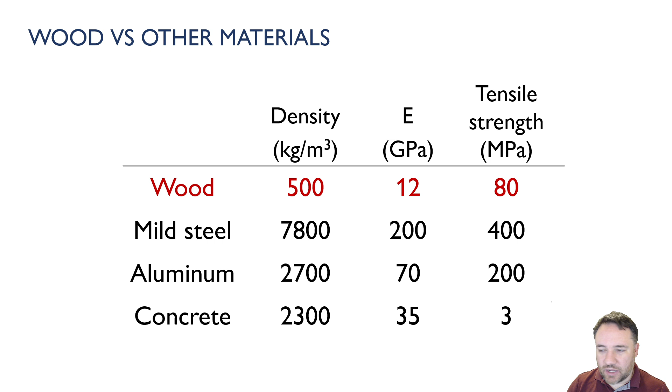So the question arises: why would we ever use wood at all if it's not efficient? Well, the reason is because if we look at it from a point of view of strength versus weight, wood suddenly becomes very competitive, because it has very high strength to weight ratios.

For example, if we look at tensile strength as a function of density, you can see that it has strength much higher than steel and close to that of aluminum per unit weight. Same for compressive strength—it's much stronger than steel or concrete as a function of its density. So it has a very high strength to weight ratio.

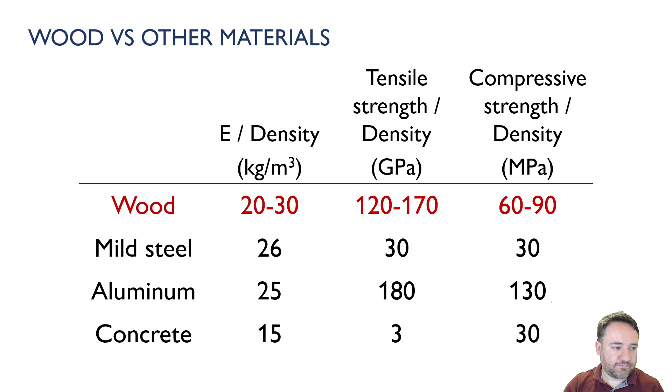That means when we want to build things out of wood, the members are going to be very light. They're probably going to be bigger than comparative mild steel or concrete members, but they may be easier to install, ship to site, and handle on site—on top of all the other benefits of wood we talked about in previous videos.

Now, if we drill down into the mechanics of wood as a material—and I have my piece of wood over here—we talked a bit before about how wood is not the same in all directions. Unlike steel, if I load it this way, or this way, or this way, it's going to be approximately the same in every direction. But for wood, that's really not the case.

Wood is strongest in its longitudinal direction, meaning me pulling or pushing on it like this, and it's very weak in the radial and tangential directions. Remember from looking at the cross section that we have a radial direction coming out from the pith, and a tangential direction, which is tangential to the growth rings.

In general, we don't know exactly which direction those rings are going to be in any given piece of wood. But luckily, tangential and radial strengths and stiffnesses are similar to each other, so it doesn't really matter which way the grain goes in those two directions. I'll consider this direction and this direction to basically be identical for design, using a worst case, and I won't be losing much by doing that.

So instead of talking about radial, tangential, and longitudinal strength separately, we really only talk about it in terms of longitudinal versus perpendicular to the grain strength—parallel to grain strength, which is equivalent to longitudinal, and perpendicular to grain strength, which is both radial and tangential. It doesn't matter if we look at it up and down and side to side, or radial versus tangential.

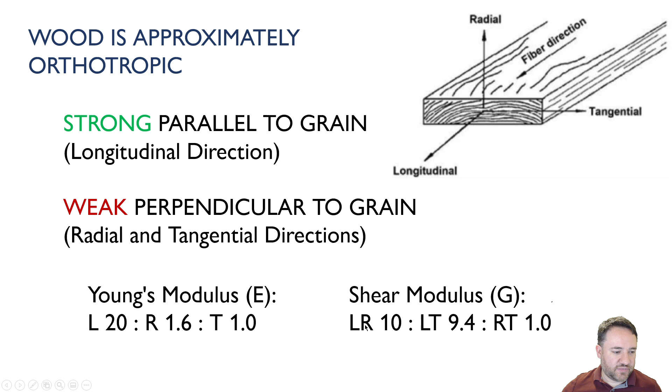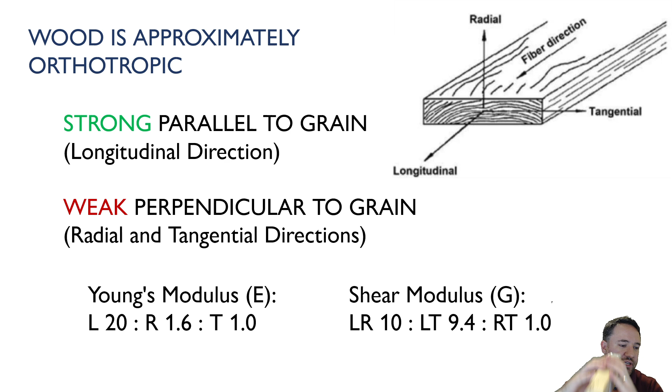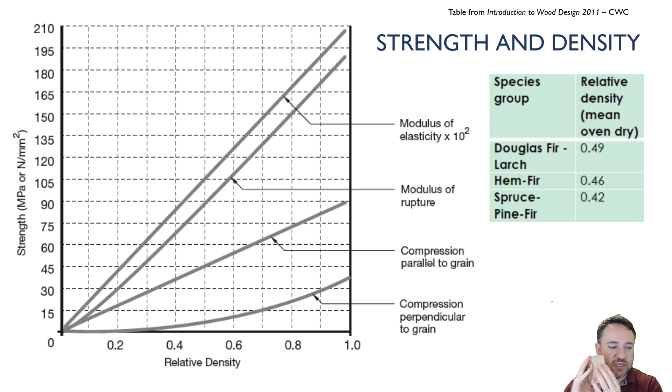Now, for different species, they obviously have different strengths, and we talked about hardwood and softwood before. The strength of the wood is typically directly correlated to the density of the wood. So the more actual wood fiber material in this piece of wood, the stronger it's going to be, basically, per unit volume. And that applies to strengths.

You can see here the compression strengths parallel to grain, which is like pushing like this, and perpendicular to grain, which is pushing either like this or like this. The higher the density, the higher the strength. Modulus of rupture, the same, and modulus of elasticity. The stiffness is also approximately linearly proportional to the density.

You can see the density of common species that we use for construction here on the right, about 0.4 to 0.49. There's not a lot of range. So you can see that our compressive parallel to grain strength, for example, varies in quite a small range for the species that we're usually talking about. In fact, probably specimen to specimen differences are going to be much larger.

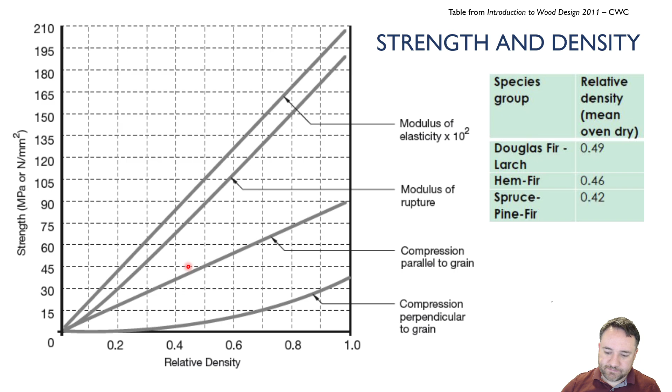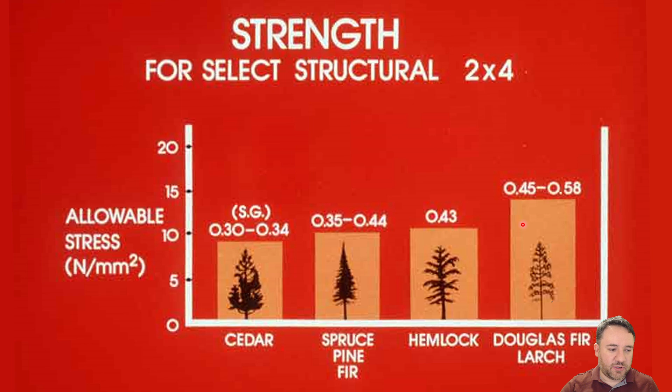And so if we take a whole bunch of these, line them up all in this longitudinal direction, thousands and thousands of them, then put them all together, bind them with that material lignin, then we get this solid piece of wood. And the strength of the wood is directly correlated with the strength of the fibers. So the fibers are strongest in the vertical direction, and so the wood is also strongest in the vertical direction.

So one way to conceptualize this is using straws. If we see I have just one straw here, and this straw can represent one wood fiber, and this straw is very strong in tension, except for the fact that this is a bendy straw. It's very strong in tension. It's strong in compression up to the point that it buckles.

But it is not very strong in the perpendicular direction, right? I can just smush this straw very, very easily. I'm just smushing this thin circular cross section, which is very similar to what the wood fibers look like. And if I were to pull apart as well in this direction, it's not quite as strong. But for the fiber itself, it's not too bad.

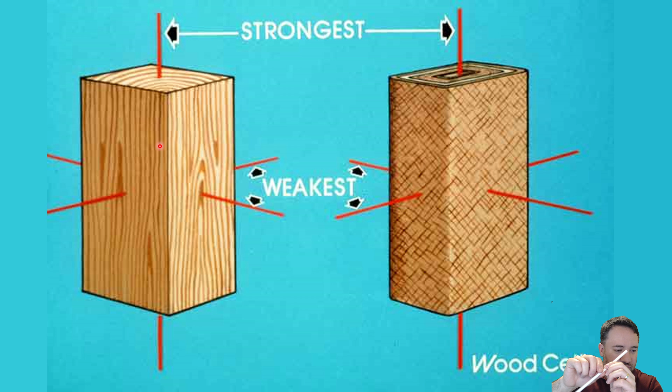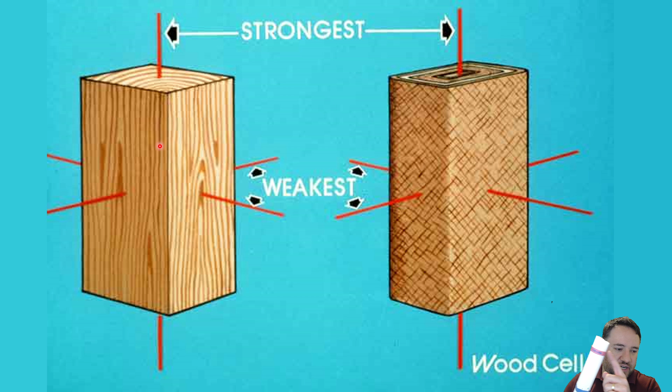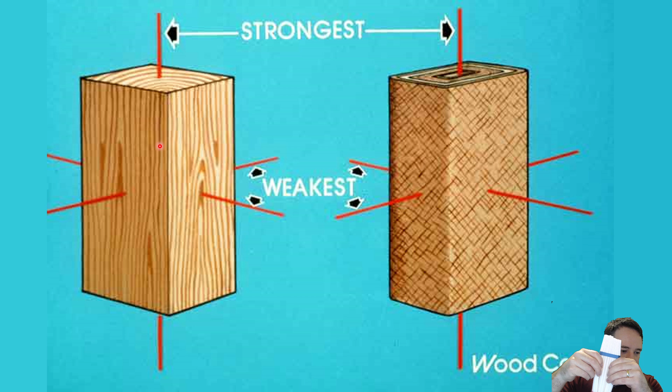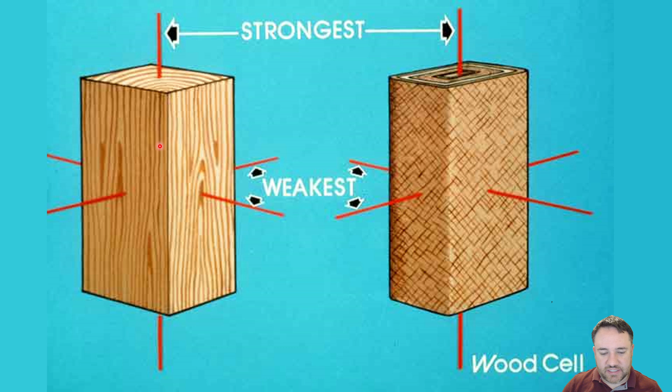But once I stack them all up, it's going to be a problem. So if I take a whole bunch of straws and put them together just with some elastic bands, these elastic bands are now representing the function of the lignin, which holds all these fibers together in the real wood structure. Now I have something that's very strong in tension, very strong in compression, as long as those fibers are held together by the lignin, and very weak in this direction, and also very weak in this direction, because I can pull those fibers apart potentially, depending on the strength of the lignin again. So we're going to go through each of these mechanisms for loading and relate back to this example of the straws.

So why is wood developed this way? Why is the strength of wood in the vertical longitudinal direction? That's the way the tree grows. Here's a piece of wood cut out of a log. The log is vertical, the tree is vertical, and the pieces we cut out of it are in the same direction, because that's the long direction of the tree. That's how we get long pieces of wood.

So why is it that the tree has its strongest direction in the vertical? That's because the primary structural load on trees typically comes from wind. Wind is a lateral load on the tree, which wants to blow it over.

In order to resist bending, we know from mechanics that we need tension and compressive stresses in the wood—tension on one side, compression on the other. If I'm pushing this way, I'll have tension on the near face and compression on the far face, just like shown here. So if the wind is pushing toward the left on this tree, one side of the tree will be in tension and the other side in compression. Those are the bending stresses in the tree, and there is some shear, but not much compared to these primary forces.

There's no load on the tree that typically smushes it like this, so it doesn't have to be very strong that way. There's also no load that tries to pull its fibers apart, so it doesn't need to be strong like that either. So the tree wood's mechanism for resisting load is actually very efficient.

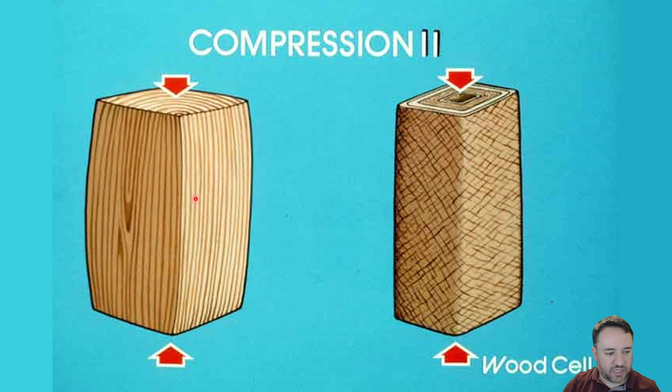Now, compression parallel to grain: if I have my piece of wood and press it parallel to grain, holding it in my hands it feels very strong. But if I tested vertical compression versus compression perpendicular to grain with a testing machine, I'd find a very big difference in strength. Perpendicular to grain is much weaker, because I'm squishing the fibers like this, and squishing a tube like this is very easy to do, especially for thin tubes.

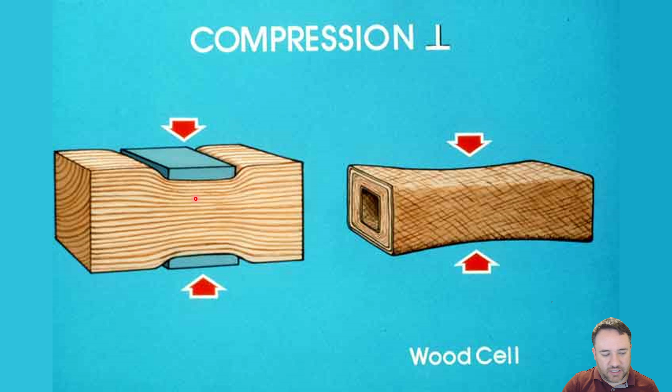Stacking the fibers up doesn't help much in this case, because I'm still squishing all the tubes at the surface—it's still very easy to squish. So stacking them and putting them together with lignin doesn't help much for compression perpendicular to grain. We obviously have to load wood perpendicular to grain sometimes, and we'll learn how to do that, but the strength is much less, so we have to pay particular attention to bearing areas.

Now let's say I have compression that's not exactly parallel to grain and not exactly perpendicular to grain—loading it at an angle to the grain. Then some component of the load goes parallel and some goes perpendicular, and I can derive an interaction equation to interpolate between those two strengths. That's exactly what the design standard does, and we'll learn that when we get to compression perpendicular design.

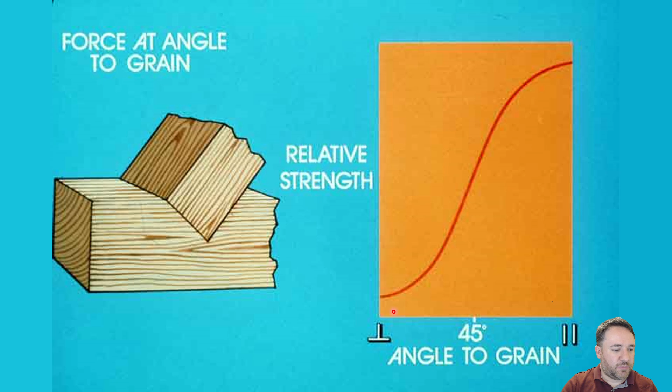Okay, so now tension is very straightforward because I'm just pulling on the fiber. The fibers are very strong in tension, so tension strength is quite strong. Putting them all together does not get me a huge benefit because I'm still pulling on the fibers.

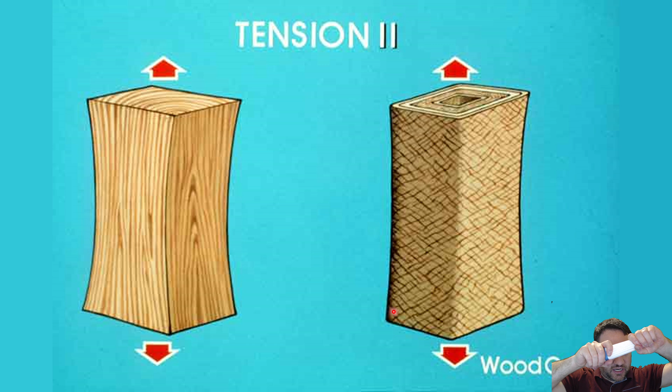Now there is something we mentioned before about wood defects that affects the strength of wood in tension, which is that if I have knots in my piece of wood... I don't have significant knots in this particular piece, it's kind of a clear specimen. I don't have a lot of knots, but if I had a big knot here, that would reduce the net area available to resist tension, and so that would weaken the tension strength.

So although tension in wood is generally very strong, we'll see when we look at the actual values that the compression strengths in the table tend to be a bit higher because they're less affected by the defects. So tension is affected more by defects in the piece of wood, particularly knots.

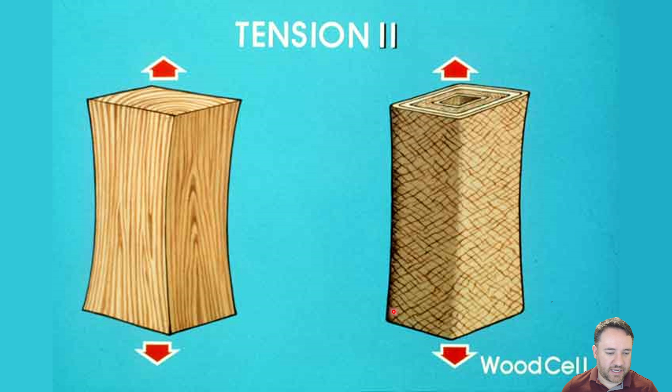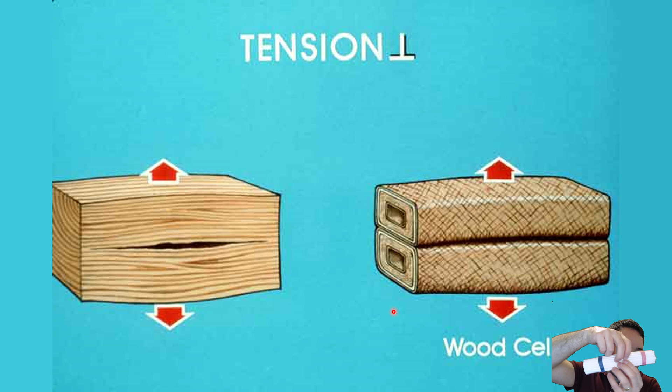Okay, now tension perpendicular. I mentioned before, if I try to pull this straw apart, tension perpendicular will be quite strong because I would have to tear the wall of the straw in order to do it. But if I have a whole bunch of straws together and I pull them apart, if I don't have anything holding them together, it's trivial. If I have this lignin holding it together, then of course it's going to depend on the strength of the lignin. And the strength of the lignin is quite a bit less than the strength of the fibers themselves.

So the cellulose fibers are quite strong. The lignin comparatively is quite weak. So it's good enough to hold it together to prevent buckling by making all the fibers act as one. But if I try to tear the straws apart from each other just by pulling them, it's quite comparatively easy because the lignin itself is not an extremely strong material.

And this is basically the worst way that I can load a piece of wood because the tension perpendicular strength is just that weak. So in all of our designs, and we'll talk about this again when we get to connections, we always try to avoid loading wood like this. So there's not actually even a strength equation to figure out what this kind of strength is, except for when we calculate connection strength and we talk about splitting.

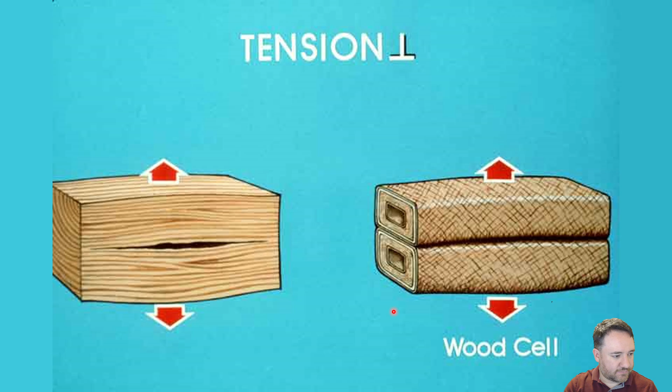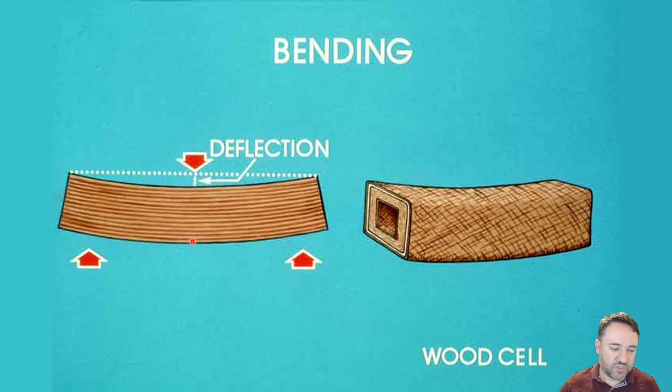And compression and tension are good ways to load wood. If I'm talking about parallel to grain, compression parallel to grain here, tension parallel to grain here, then the bending strength is actually very good because we're basically relying on mechanisms that wood is designed for—trees are adapted for bending. So wood is also well adapted for bending, which makes good beams.

Okay, the last one that we really need to talk about is shear. So if we design in steel, usually shear is not a big deal. When we design in concrete, shear is a bigger problem. And when we design in wood, shear actually is also quite a big concern.

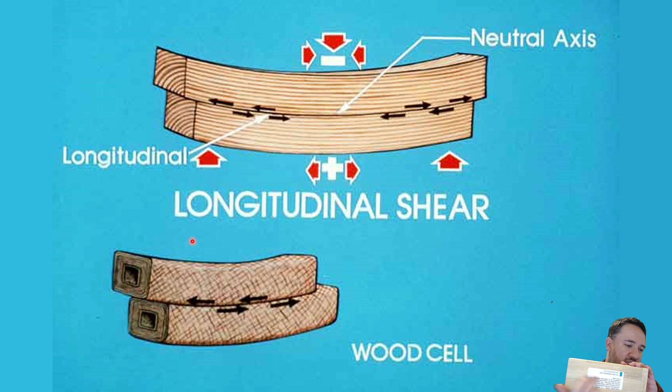And that's because when we have bending, we have shear, as we know. So if I'm bending this, I have some shear, and that shear is highest at the center of this rectangular cross section. At that section, basically what's happening is the fibers are trying to slide against each other, just like shown in this figure at the top. One set of fibers wants to go one way, the other set wants to go the other way—we're shearing it like this.

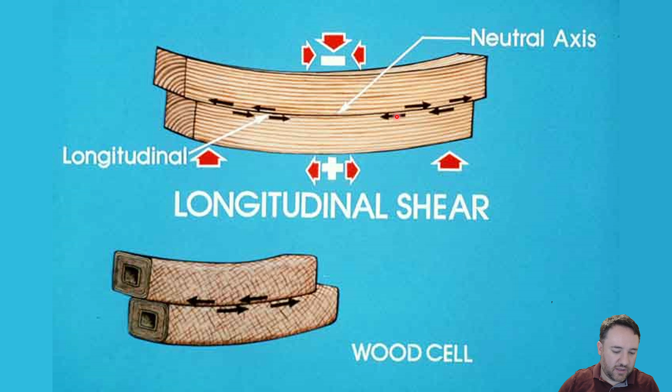So if I bend this... let me go full screen so we can see it a bit better. If I start to bend this, we'll see that the fibers want to slide against each other. You can see when I bend it, the fibers at the top want to go out, and at the bottom are trying to go in when I'm doing this. So the fibers want to slide against each other—they want to kind of do this when I bend.

And what is resisting that movement of the fibers sliding past each other is again the lignin, which, as we discussed before, is not very strong. So longitudinal shear strength is something we have to pay close attention to when we're talking about wood design.

Okay, so now once we're ready to design, we can go to the handbook.

We can use our Canadian Wood Design Manual. This is volume 2, which has all the code clauses and everything in it, and the code commentary. We can go in here and pick out our design strengths from tables. We're going to learn exactly how to do that in another video.

Just to give you some context, here's one example for lumber. You can see we have different species on the left and different grades. We're going to talk about what those grades mean later in another video. But you can see that for each of these, we have all different strengths.

So when we design in steel, we just have one strength, right? Which is our steel yield strength, Fy, which is typically something like 350, or for rebar, 400 MPa. But for wood, depending on which kind of failure mode we're talking about, longitudinal shear versus compression parallel to grain versus compression perpendicular to grain, we have all these different strengths.

You can see that bending, compression parallel to grain, and tension parallel to grain are typically the highest. Perpendicular to grain compression is lower, and longitudinal shear is the lowest of them all. We don't even have a tension perpendicular to grain column here because it's even lower still, and we have to avoid designing for tension perpendicular to grain.

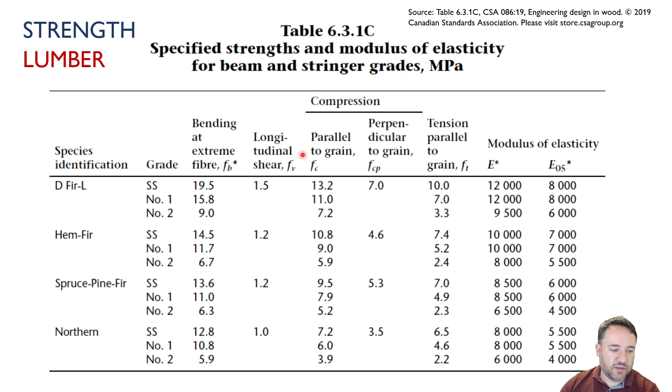This is something I definitely don't want to happen, so I use the 5th percentile strength. This is something I just want to keep controlled, so I use the mean strength. All these values, by the way, are more like 5th percentile strengths, and we're going to talk about that later in this presentation.

For glulam, we have a different table. It's a bit different, and all the glulam values are basically in one table. But you can see it's the same kind of thing. I have a species and a grade, and then on the left, instead of on the top, I have all of the different types of design cases that I might want to look at.

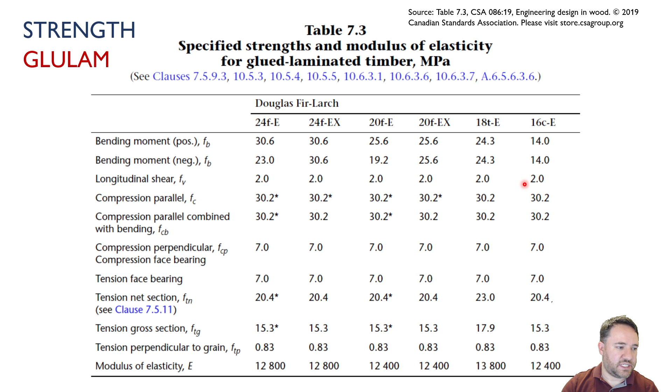For example, if I'm interested in designing a piece of glulam for compression perpendicular, then I'm going to get my value out of this row, depending on the species and grade. Longitudinal shear, again, is very low, and I'm going to take it out of this row. We're going to go through some examples in more detail about how to use these tables to pick out design strengths.

Now unlike steel, there are more things in service, and since wood is a natural material, and since wood is particularly affected by moisture, and because wood is viscoelastic, there are a lot of different modification factors that we have in design. Once you get some experience doing this wood design, you're going to see how these factors just come back again and again. It's kind of a tale of factors when we're doing wood design.

So we have our resistance factor, which accounts for material strength over a population, which we're going to talk about, that you would probably be familiar with if you've ever looked at steel or concrete design. But all these other ones will be new. Duration of load factor - how long is the load going to be there, because wood is viscoelastic.

System factor is how many pieces are holding up the same load. This is important because wood has defects, so looking at one piece versus looking at multiple pieces is a different story.

Service condition is how moisture affects the wood. What moisture content is the wood going to be at when it's in service? We know that adding moisture in wood reduces the strength and the stiffness.

Treatment factor is if I've treated the wood, the treatment process weakens the wood a little bit, so we have to account for that. Size factor is another thing that accounts for wood being a natural material, meaning there could be defects and different natural things that affect the strength of that piece of wood.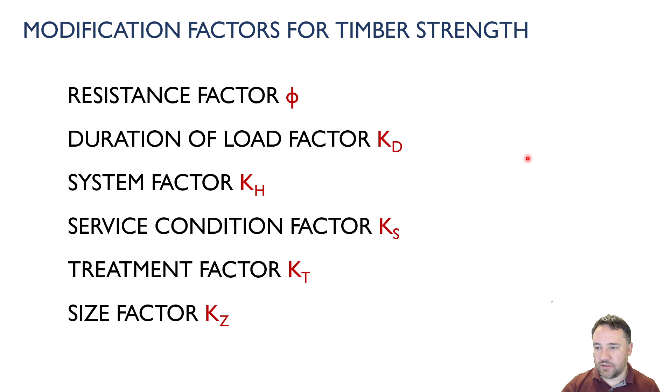We're going to talk about each of these in turn. So the resistance factor for wood, there are two, depending on which way we're loading it. If we're talking about bending, shear, or tension, then our strength reduction factor for material reliability is 0.9. If we're talking about compression, parallel and perpendicular, it's 0.8.

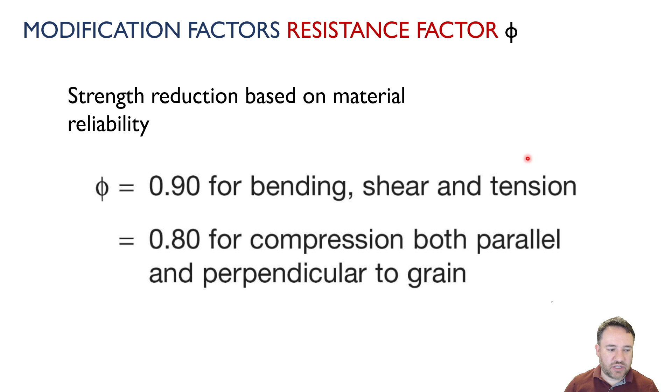These numbers are based on reliability analysis. We do reliability analysis based on a large population of specimens, doing a whole bunch of tests, and seeing what is the distribution of different strengths.

This is an example of what that kind of looks like. So if I test a whole bunch of pieces of wood like this, of a specific species and grade, probably they're not all going to be the same strength, obviously. Their strength is going to be distributed over some range.

So if X here is the strength, and the vertical axis is the frequency, this distribution is showing how many of all the pieces of wood that I test are at this strength, how many are at this strength, how many are at this strength.

The width of this curve, how wide it is—if it's very tight, that would indicate there's not a lot of variability in the material properties. Like if I had steel, it might be a little bit thinner. But with a natural material like wood, I'm going to have some that are very low, some that are very high, and a whole bunch in between.

This particular distribution is a normal distribution—you might have heard it called a Gaussian distribution or bell curve. This is not actually the distribution they use for wood; they actually use a Weibull distribution, which limits a bit better what the lower bound values are. But for the purposes of discussion, we're going to talk about everything as if it were a normal distribution curve.

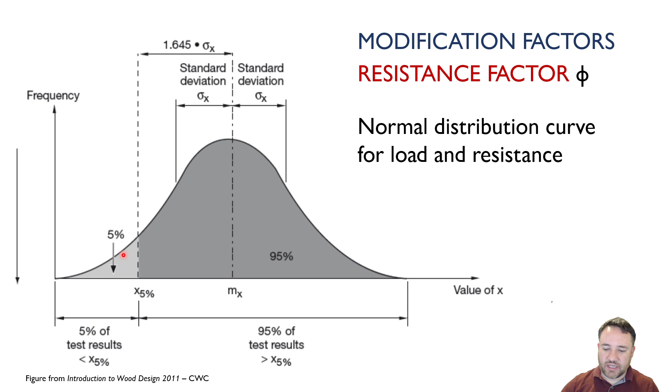So when we're talking about load resistance factor design, LRFD, which is the way we design structures in Canada, we're talking about two different things. We have the resistances, which is what I just talked about, and those are variable, but the loads, we have to remember, are also not constant.

So we have snow load. Snow load is not just one load—I mean, we come up with one load for design, but that load is based on a whole distribution of potential loads that we could get.

In order to design, of course, we want our resistance to be higher than the load we're applying. But we can't really reasonably push this curve so that it's effectively zero here, and this curve so that it's effectively zero on the other side. So we're always going to have some kind of overlap because the tails of these curves are quite long.

So we have to make a choice of where we want that overlap to be, and that's where the reliability analysis comes into play. But let's say, for sake of argument, that I want to take the 95th percentile of the load effect—such that 95% of all the loads that the structure sees are going to be below that value.

So it's like an effective upper bound on the load. And I want to make that less than the 5th percentile of the resistance, so that 95% of all members are going to be stronger than that.

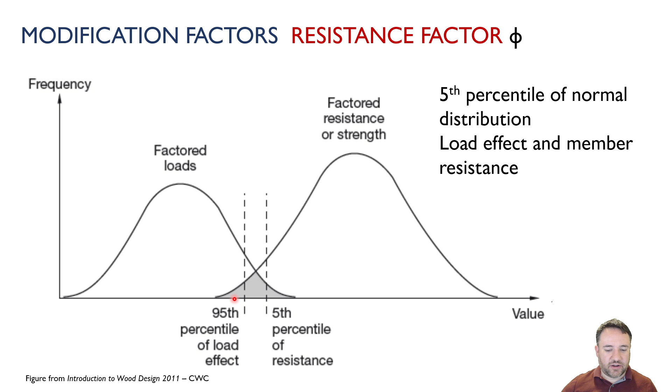And if we use statistics, we can measure how much that chance is going to be. And it's always going to be non-zero for all of the designs that we do. That's why when we do structural engineering design, we set a limit and try to make sure that all the structures we design are about the same level of safety, and that's the reliability.

So basically, if I have that resistance and that load, I can calculate this safety index by subtracting the population of one from the population of the other, and I end up with this curve on the right, where I'm looking at what is the chance that I'm going to get a failure, which means what is the chance that the resistance I get is going to be less than the load I get.

So if I take all possible pairs of resistances with loads and add them all up, I take R minus S, the resistance minus the load, which is basically how much gap I have between my resistance and my load. As those get closer and closer together, the subtraction of the two, the Z, the resistance minus the load, is going to get closer and closer to zero.

And once I get to zero, that's when my resistance exactly equals my load. Anything less than that means that my member is going to fail under that resistance-load combination.

So if I do that statistical analysis, then I can integrate underneath this curve to the left of that point zero where the failure occurs, and I can come up with a probability that my member is going to fail.

And I want to make sure that this is the same for all of the structures that I design. Another measure of where that point is, is basically how many standard deviations the mean of this Z distribution is away from zero. That is my beta. And beta, another way to think about it, is it's the inverse of the coefficient of variation.

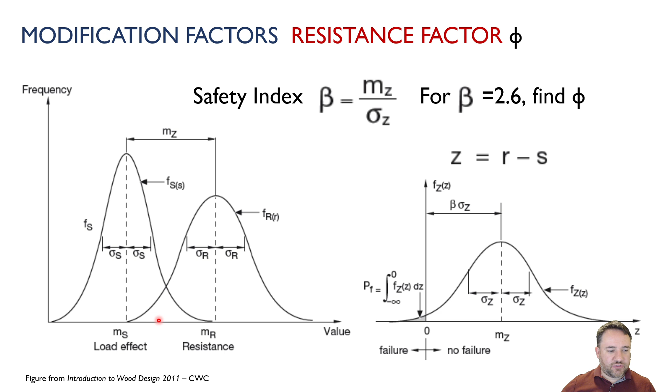Again, these are all normal curves. In reality, for wood, it's not a normal curve, but this is a good approximation.

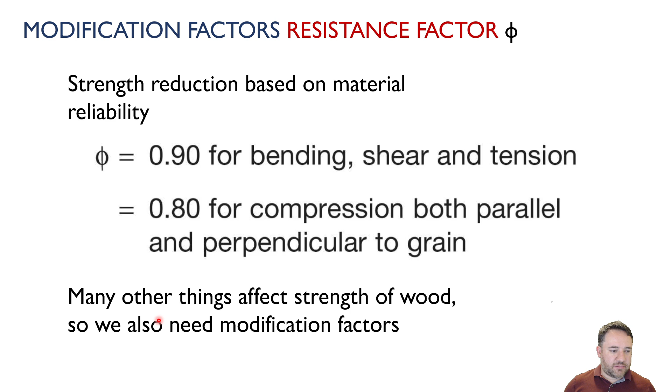So then we come back and pick out from that process what our phi has to be. That's where the process typically ends if we're talking about steel design or concrete design. But for wood, since wood changes depending on the situation it's in, we have a whole bunch of other modification factors we need to talk about.

The first one is our duration of load factor. I mentioned earlier that this factor is necessary because wood is a viscoelastic material. Another viscoelastic material that you'll be familiar with is concrete, and the way that manifests for concrete is through creep.

If I load it over a very short period of time, very fast, then the strength is high. If I use that as a baseline of 100%, I can figure out, relative to if I loaded it very fast, like over an hour, versus over a long period of time, how the strength of wood changes over that time.

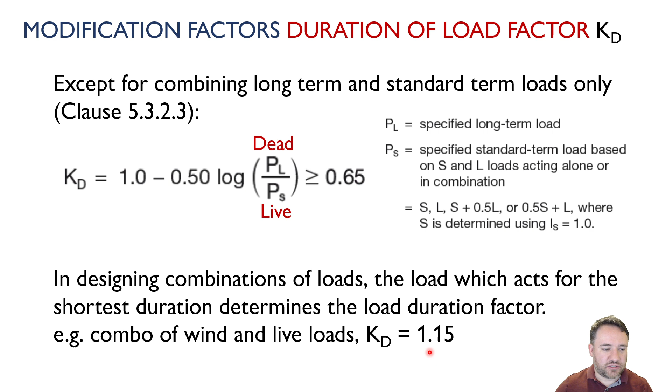In general, if I have other combinations of load from the NBCC or OBC or whatever design code I'm using, I will generally take whichever is the best case scenario for me, which is a bit counterintuitive. Usually you'd say, if I have earthquake load and dead load in this combination, the worst case scenario is to just use dead for everything, because dead gives the lowest value of KD, reducing my strength the maximum amount. But the design standard explicitly says it's the reverse — we should take the KD for whichever load is the shortest duration. So if I have a combination of earthquake and dead load, I'll actually use the earthquake KD for the entire load combination when calculating my resistance.

So if I'm comparing a resistance to a load combination that includes earthquake and dead, I'm going to use KD of 1.15. So it seems unconservative, but the reason is because the chances that you're going to run into the worst case strength for my piece of wood at the same time that I have my worst case earthquake are very low. So it's trying to balance the conservatism that's inherent in this process, which makes it a bit non-intuitive. So just keep that in mind.

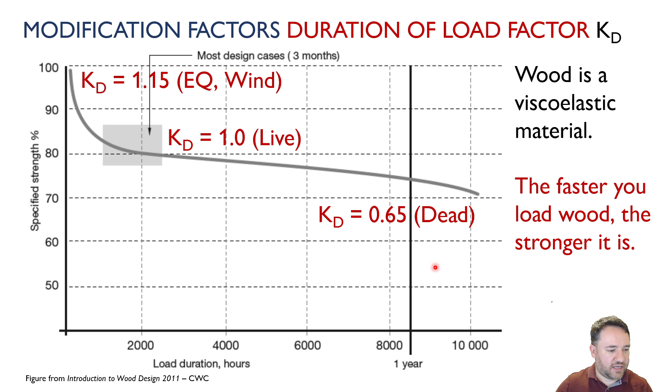We'll do examples that show this in some other class activities. Okay, so that's the load duration factor. So that's only one of 5 different important factors that we need to talk about.

The second one is our system factor. And this accounts for the fact that if I have multiple pieces of wood supporting the same load, then the risk of having bad defects in those pieces of wood is kind of smoothed out over having multiple ones. So my design equation for a single piece of wood is going to assume that I have the worst possible defects for that grade, and so I have to take that into account. I'm allowed to have a certain number of knots. Therefore, I'm assuming that I have that number of knots, and I'm designing the piece of wood for that.

Now, if I have multiple pieces of wood all supporting the same load, then what are the chances that I'm going to have the worst case layout of knots in every single piece of wood that's supporting that load? It's very low. So in order to balance that over conservatism, we have this system factor, which allows us to increase the resistance if I have multiple pieces of wood supporting the same load. And there are two different cases for this. The cases are different because they are supporting the load more together, like they're doing a better job of sharing the load, or a medium job of sharing the load.

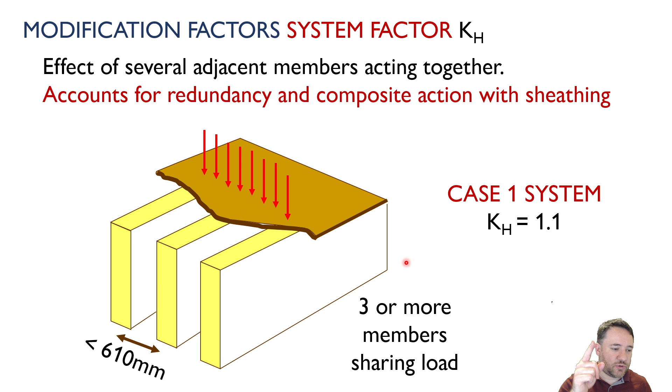So there's the effect of the redundancy caused by having multiple members, and on top of that, I have potentially the chance for composite action, which is not so great in this example, but is great in this example. So if I have some sheathing connected to those members, like plywood or OSB, and it connects all those members together, then now the sheathing is acting also composite with the beam. So the sheathing is also providing some bending resistance, and I'm allowed to increase my strength a little bit more.

And on top of that, the nailing of all of these things together connected by the sheathing makes those members that are supporting the same load more together in supporting that load. So it's more likely that they are supporting that load as kind of one effective member, just spread out over a larger space. So for case 2 system factor, I have the same requirements as the first one: 3 or more members sharing the load, and they have to be closer than 610 millimeters apart from each other, which is 2 feet. But on top of those requirements, I also have to have sheathing.

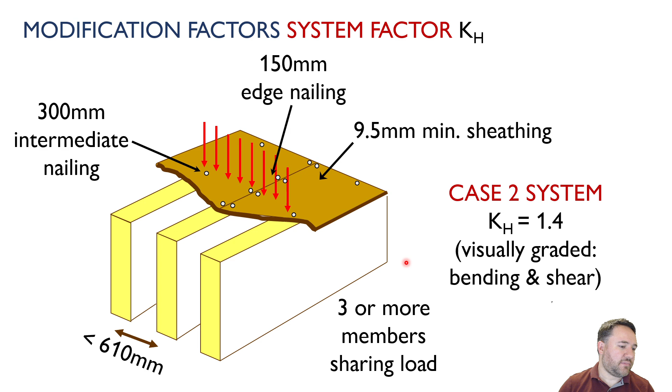That sheathing has to be at least 9.5 millimeters thick. I have to have nailing around the edges of the sheathing that's at least 150 millimeters apart, like less than or equal to 150 millimeters apart, and intermediate nailing elsewhere in the sheathing at a maximum of 300 millimeters apart. All of these requirements are in the standard, so you'll have read them already if you're following the readings. And there is a table that shows all of these things exactly for the different pieces of wood.

So case 1, which is the first one we talked about, you see here: if I'm doing bending, longitudinal shear, compression parallel design, or tension parallel design, then I get to bump up my load by 10%. Other properties, like for example compression perpendicular design, don't get the bump because compression perpendicular design is by definition a local effect, so multiple members can't help to share a bearing load. So we don't get to bump up for that, for example.

For case 2, which we just talked about, for visually graded lumber, you can see that for bending and longitudinal shear, we get a 40% bump. For compression parallel to grain, we don't get that bump because we don't have composite action happening in that case. And all other properties get 0.

MSR is machine stress rated lumber, which we're going to talk about, but we won't really have any examples of in this course, though we have different requirements for that. Built up beams is when I have multiple beams all stuck together, and I have a different requirement for that as well.

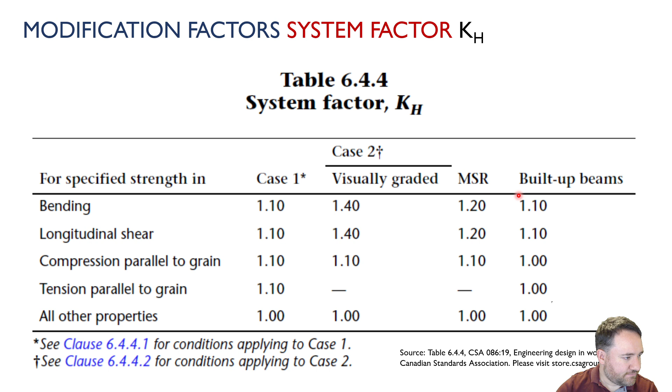Okay, moving on to number 3, the service condition factor. This is the factor that accounts for the fact that the properties of wood change when it gets wet and when the moisture content of the wood goes up, as we see here. So moisture content of the wood is going up as we go from left to right. You can see that my strength of crushing goes down, my stiffness goes down. Basically all of the strength values go down.

So we have to account for that. If I have wet wood and I know that in service my wood is going to have a high moisture content, then I need to lower my strength to account for that. I have a little slogan here: wetter is weaker.

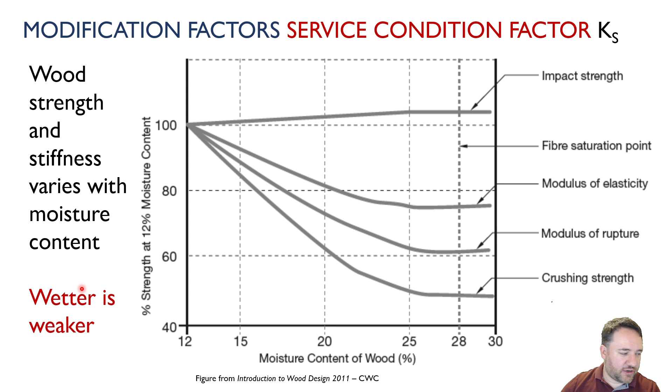Okay, so what counts for dry and what counts for wet? Well, there is a definition in the standard, and dry basically means, so if you're saying that your wood is dry, so you're not going to consider the effect of service condition factor, then the average yearly moisture content has to be less than 15%, and at no time in the year can it go higher than 19%. So it can fluctuate. It can go past 15 for some time as long as the average is less than 15, but it can't go past 19.

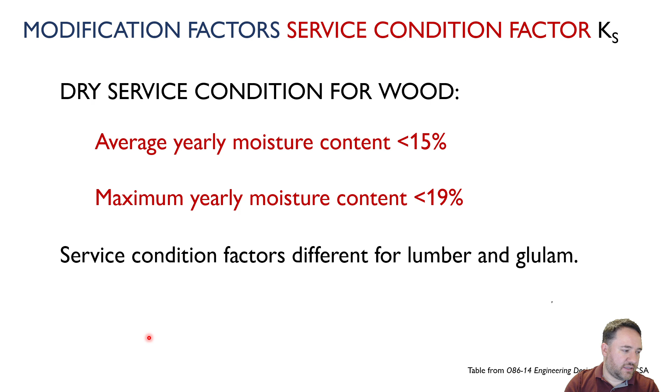And these factors are different for lumber and glulam, so there's different tables for lumber and for glulam. This is the lumber one. You can see that for dry, we basically have our baseline condition, so everything is 1. And for wet, we have different values.

For example, it depends on what kind of load we're applying, how moisture affects it. For bending, we get a 16% reduction if we have a wet condition. If we have shear, we get a 30% reduction. So it's going to affect shear more, presumably because it's going to affect the lignin strength more. Compression parallel to grain, we get another big reduction here.

Now we have a difference here between sawn lumber, between the size of the member. The smaller the member, the more wet the piece of wood is going to be over the cross section, because as we talked about when we talked about moisture content, equilibrium moisture content happens over potentially a long period of time. So if I have a smaller piece of wood, it's easier for the moisture to get all the way to the center.

But if I have a large piece of wood where the least dimension, so here I have a 38 by 89, this is a 2 by 4, the least dimension here is 38. 38 is not greater than 89, so I have to use this value. If the least dimension was greater, so if this was a 4 by 4 or bigger, then some of those factors are going to be 1, and the rest are going to typically have a higher strength. That's because the moisture can't as easily impact the entire section of the wood, because it takes time for the moisture to diffuse from the outside surface to the inside.

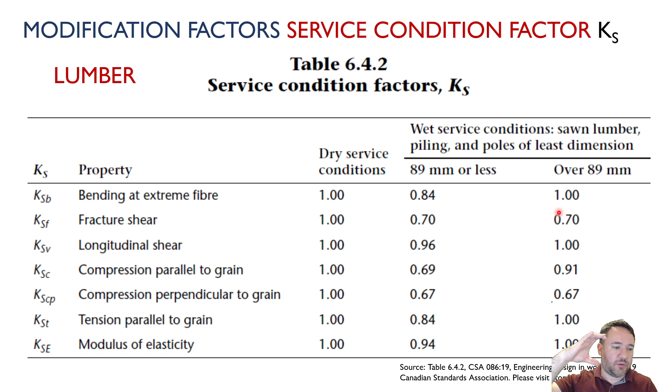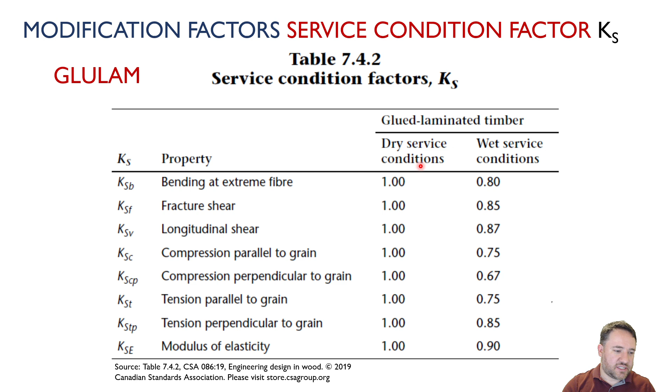But anyway, here for glulam, we have wet versus dry. The wet values you see, though, are higher than the wet values for the small pieces of lumber. That's because the glulam pieces are generally quite a lot bigger than lumber pieces are. Okay, moving on to, I think we're on number 4, right?

Modification factor type number 4 is the treatment factor. This accounts for the fact that sometimes we want to treat wood, giving it a preservative that's going to prevent rot or fire or something like that. Whether we need to reduce the strength depends on what the chemical is, and how we got the treatment into the piece of wood.

For untreated lumber, everything is 1. Preservative treated unincised lumber is also 1 for both, so no reduction in strength. Preservative treated incised lumber of thickness 89 or less starts to have reductions, and the reduction is less for wet service condition than dry service condition. For fire retardant treated wood, you have to go to the manufacturer to figure out what your reduction should be.

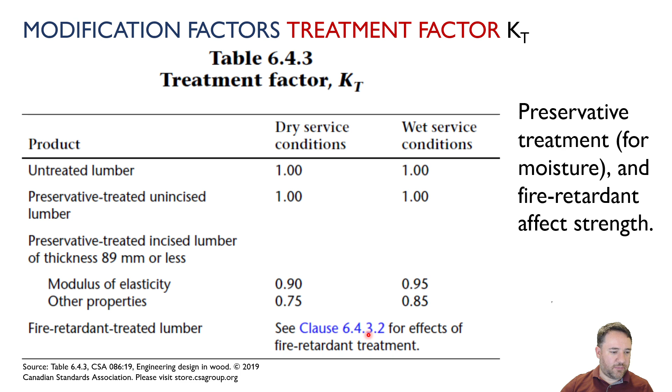Now, what is incised versus unincised? Incised means they cut a bunch of small slots in the piece of wood, the purpose being to allow the treatment chemical to get into the wood further and easier. But the process of cutting those slots affects the strength at the surface, and so it affects a little bit the strength of the entire piece of wood. So if we incise it to treat it, we have to reduce the strength.

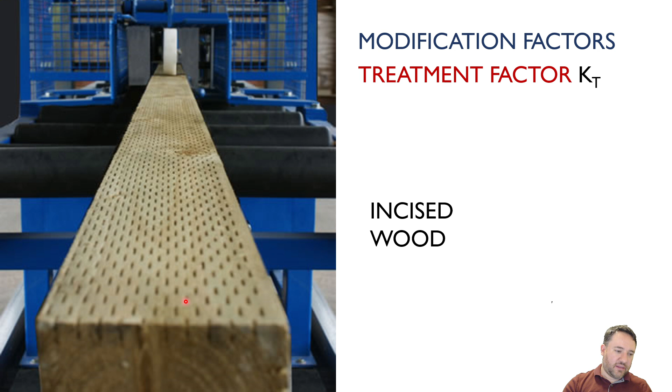Okay, finishing our marathon on size factor. This is the last kind of factor that we need to talk about. You see some of them come in this table, some of them are in clauses with calculations, so there's an equation for calculating the size factor.

But on the left it says, why do we have a size factor? Because large members are weaker. Why are large members weaker? It's not because there's something inherent to being bigger that makes it weak. It has to do with the grading process.

For visually graded lumber like this, and like most of the larger single pieces of wood that you get, they grade the piece of wood by looking at the outside, and they have a checklist of all the different criteria: how many knots are there, how many splits are there, are there wanes, what is the grain angle on the piece of wood.

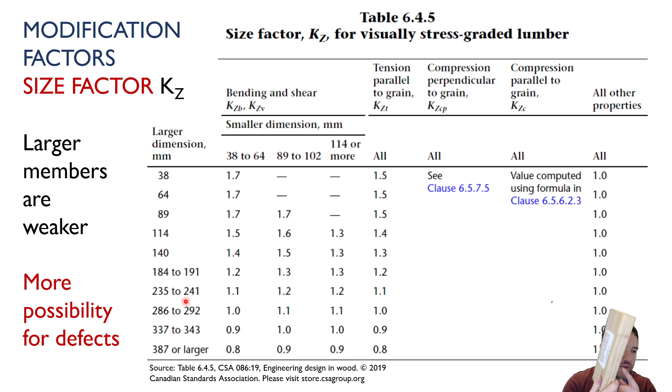Okay, that's visually graded. Since it's based on a visual inspection, it means you can only look at the sides of the piece of wood to figure out what the grade is. If I have a small piece and I look at the sides, I can get a pretty good idea - just by looking at the four sides, I can see there's not really any knots hiding in there. But if I have a large piece of wood, there's more chance that there are hidden defects on the inside that I can't see just by looking at the piece.

So that's the primary effect we're taking into account when we talk about size factor. For larger pieces of wood, to account for the fact that the grading process is less accurate because we're just looking at the outside of the piece, we reduce the strength.

So you can see we have dimensions here, larger dimension and smaller dimension. For this piece, the larger dimension is this long dimension, which is 89. The smaller dimension is 38. So my bending and shear KZ factor, the size effect factor, is 1.7. So it's 70%.

Now these numbers are a bit arbitrary. They're based on a baseline - they did tests, the test pieces were this big, and then relative to that they said, okay, what's the size of something that's this big? And they said, oh, it's 70% greater because the grading is better. So therefore the factor is 1.7.

So this is a function of where the strengths in the other tables are defined for. Like if I went to the strength tables, the baseline size for that strength is a certain size, and relative to that, the strength can either go up or down depending on the size.

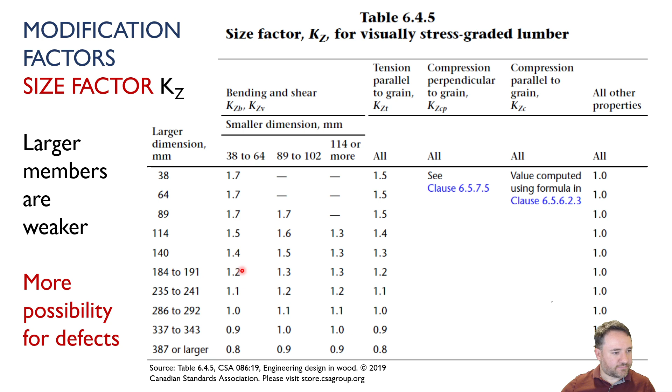Okay, so going forward, we're going to talk about grading, and we're going to talk about how to actually find these strengths.